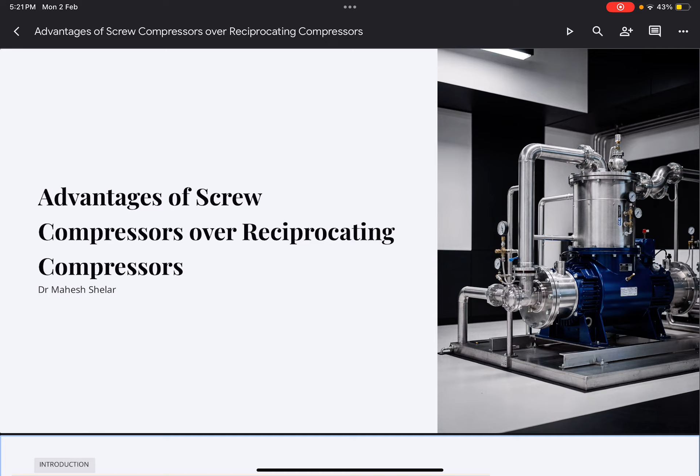Friends, we would be discussing screw compressors with reference to reciprocating compressors, wherein we would emphasize the advantages of the screw compressors over the reciprocating compressors. So, this is the agenda of discussion.

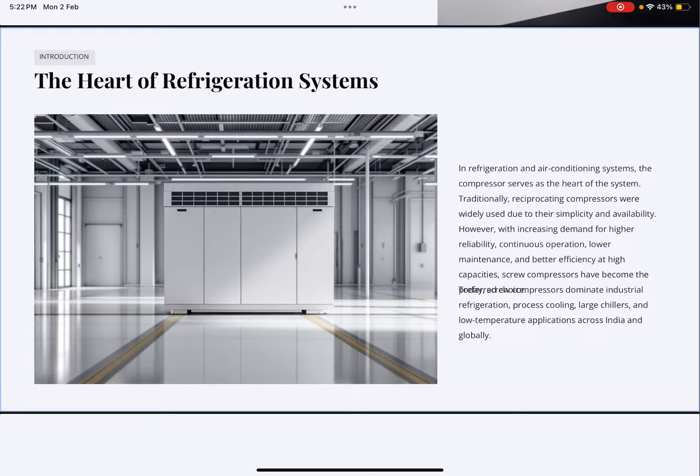We all agree that compressors are vital for refrigeration systems and they perform an important function of maintaining the pressure difference between the condenser and evaporator. Traditionally, reciprocating compressors are widely used. They continue to be used, and the reason being that they are simple, they are readily available. However, of late, in some applications, reciprocating compressors are replaced by the screw compressors, and they are considered to be more reliable and efficient than the reciprocating ones.

To differentiate between the two technologies, we need to understand that both the reciprocating compressor as well as the screw compressors happen to be positive displacement machines. It means the pressure rise is obtained because of the reduction in the volume. Construction wise, they are different. One is reciprocating, other is rotary. Reciprocating compressors have a piston cylinder arrangement, whereas the screw compressors have two intermeshing rotors.

Reciprocating compressors have the suction valve and the discharge valve, whereas the screw compressors do not have a suction or discharge valve. Reciprocating compressors deliver during the delivery stroke when the discharge valve is open, so the refrigerant flow is intermittent. In the screw compressors, on the other hand, one gets a continuous compression process.

An important difference is the presence of more moving parts and higher wear in case of reciprocating compressors, and by virtue of very few moving parts in the screw compressors, the maintenance is less and the wear and tear is lower.

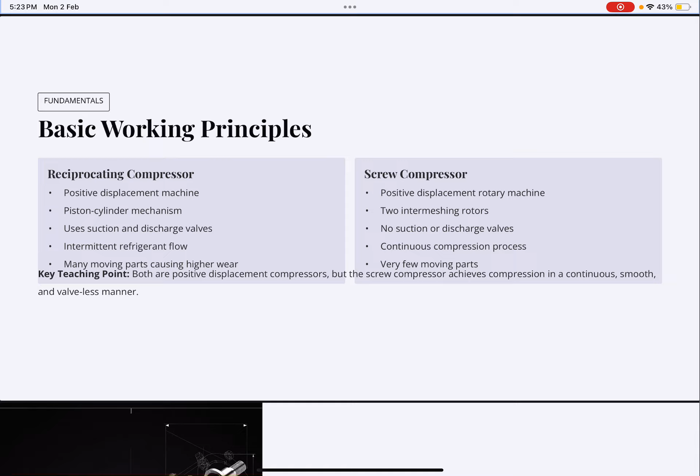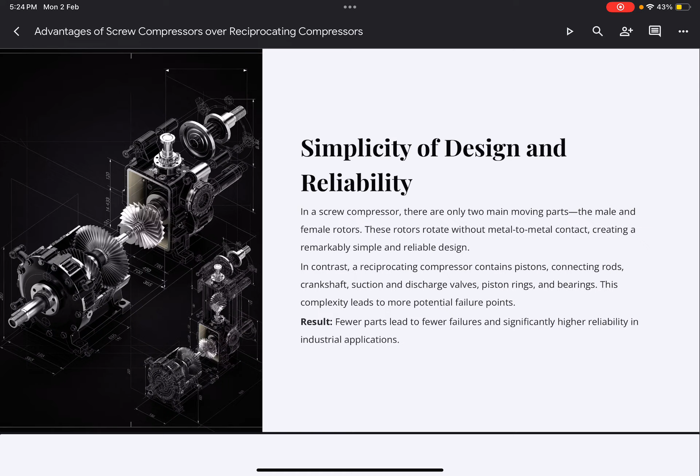Because of such a simple design, screw compressors basically have only two moving parts, as against the reciprocating compressors which have pistons, connecting rods, crankshafts, suction and discharge valves, piston rings and bearings. One can surely say that screw compressors are simple in design and more reliable. So the high reliability is because of fewer parts. Fewer parts, so fewer failures.

The lubrication system in case of screw compressors is what is known as the fully oil flooded lubrication system. What does that mean and what role does it play? It means that the compressor remains completely flooded with oil, and this oil performs three critical functions. One obviously is lubrication, the other two are cooling and sealing.

Because the lubricant itself performs the role of cooling, we need not go for an additional cooling technique for the compressor body, and because of that overheating is prevented. And because the entire compressor is well lubricated and completely flooded, that design gives a higher service life for the bearings as well as the rotors, and hence the maintenance requirements are dramatically reduced in comparison with reciprocating compressors. So that is the lubrication advantage for the screw compressors.

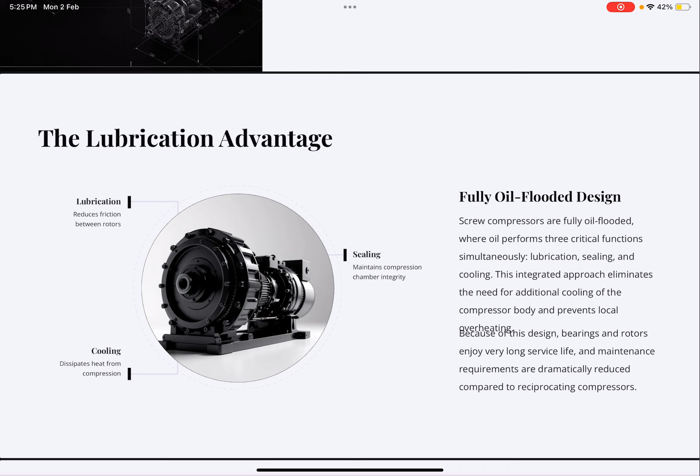Another important advantage is temperature control because of the flooded type of lubrication system. The oil absorbs the heat, as a result of which the discharge temperature is lower than that obtained with reciprocating compressors. With lower discharge temperatures, the compressors are well within the safe operational limits. A lower discharge temperature means lower thermal stress, no oil degradation, overall improvement in compressor life, and better performance.

To quantify the advantage, let us look at the numbers. Screw compressors reportedly operate for 40,000 to 60,000 hours without any major overhaul. Screw compressors report zero valve failures because there are no valves to fail. And because there are no piston rings, there is zero piston ring wear. So this is the advantage over reciprocating compressors: absence of valves, so no valve failure; absence of piston rings, so no piston ring wear; and longer operating hours without major overhaul.

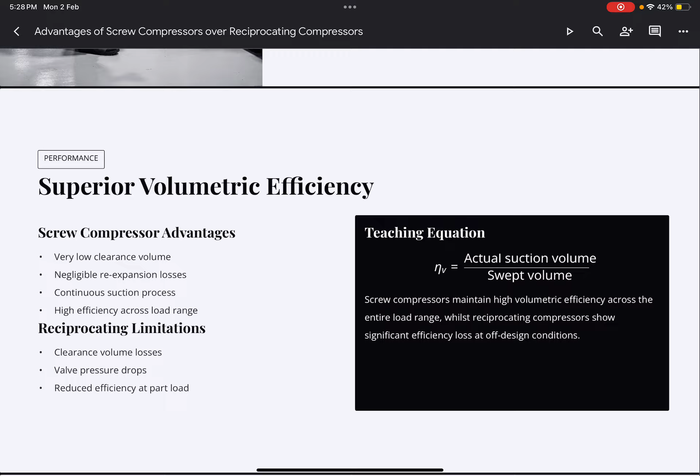The other advantage is that there is no clearance volume. We have studied that reciprocating compressors have a lower volumetric efficiency because of the clearance space which has to be kept in the arrangement, and one cannot avoid it because of the valves present in reciprocating compressors. So screw compressors get the advantage of superior volumetric efficiency because of the negligible clearance volume.

Because of the absence of clearance volume, there is no question of re-expansion. As we discussed for the volumetric efficiency of reciprocating compressors, it is not 100% because of the re-expansion of the charge trapped in the clearance volume. So reciprocating compressors have a limitation of clearance volume losses, valve pressure drops and reduced efficiency, whereas the screw compressor has a superior volumetric efficiency across the load range.

Another important advantage of the screw compressor is in capacity control. In screw compressors there is an internal slide valve mechanism used for the capacity control. So depending upon what capacity the system has to operate at, the slide valve mechanism adjusts itself accordingly. This way one can achieve a variation in capacity from 100% to 10% using the slide valve capacity control.

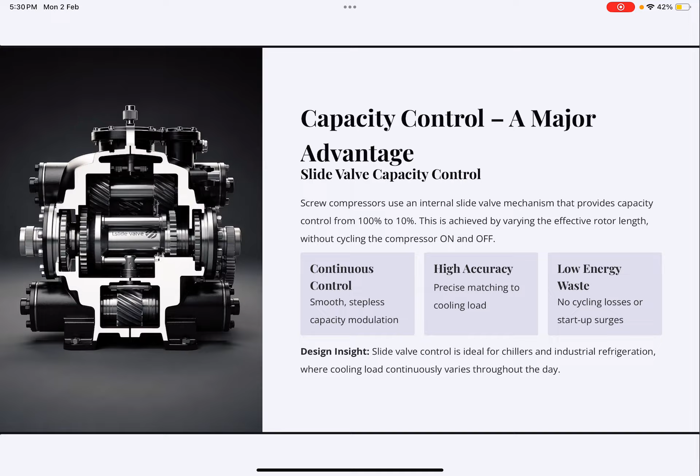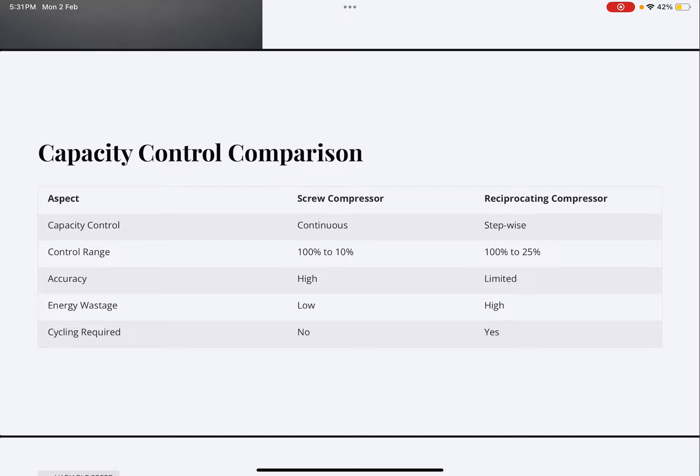The slide valve control is especially ideal for chillers and industrial refrigeration, where the cooling load varies continuously throughout the day. So the main advantage of the screw compressor is in capacity control, as you see in this table, and the efficiency advantage is also substantial.

Another important integration possible for the screw compressor is with the variable speed drive. Screw compressors can operate efficiently at variable speeds because the lubrication system is independent of the rotational speed. Electronic controls allow smooth speed variation. In reciprocating compressors, on the other hand, if you change the speed, the lubrication quality gets affected, and there are also mechanical limitations which restrict the speed range.

So with the new technology called VFD, variable frequency drive technology, screw compressors are ideal. They are more compatible with VFD-based technology, and that technology is now becoming common, in fact mandatory, across India.

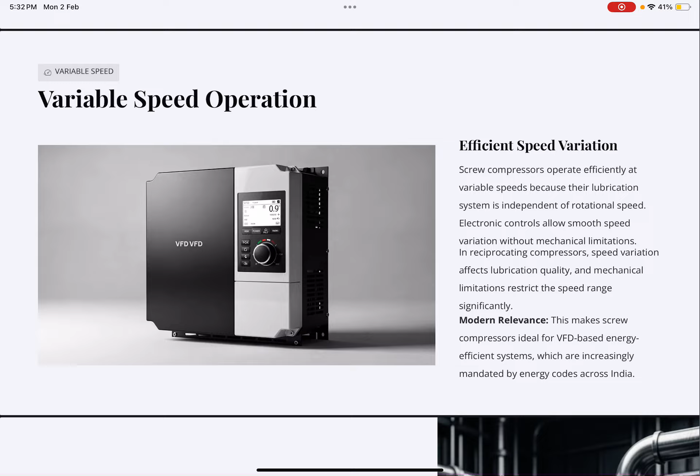The third important advantage of screw compressors is the ability to handle liquid refrigerant. In reciprocating compressors, even a small liquid slug can lead to valve damage or break the connecting rods, which might lead to complete compressor failure. Screw compressors, on the other hand, can safely handle liquid because of the flooded compressor design, which absorbs the shocks, and because there are no valves, there is no question of valve breakup.

In cold storages or during defrost cycles, liquid flood back is common, that is, liquid might enter the compressors. Under such conditions, screw compressors are advisable because they will survive liquid flood back, whereas reciprocating compressors often fail.

The advantages of oil management in screw compressors are given on this slide. One advantage is that the oil operates at a higher discharge pressure, which eliminates the foaming risk otherwise present in reciprocating compressors. Second, there is no oil migration problem during the startup cycle; the oil will not migrate to the crankcase as in the reciprocating compressor.

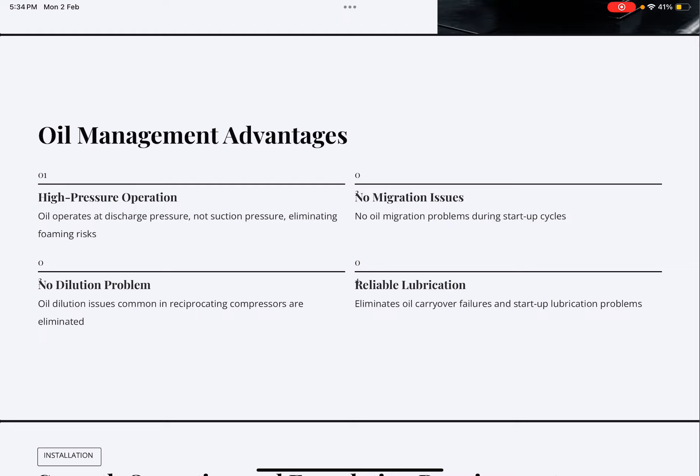So the advantage of screw compressors is pure rotary motion with no unbalanced inertia forces, so the vibration levels are quite low. Even a lighter foundation is sufficient for these compressors, and that leads to lower installation cost.

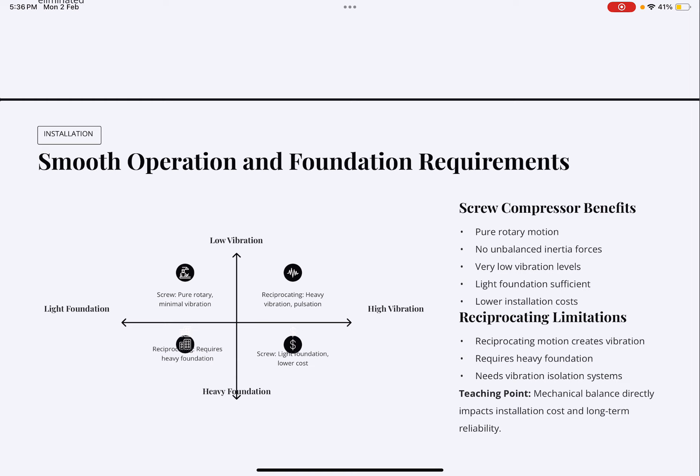On the other hand, because reciprocating compressors experience vibrations, we need heavier foundations and vibration isolation systems. So in installation also, reciprocating compressors have a disadvantage compared to screw compressors. Screw compressors require a lighter foundation, have lower installation cost, and less vibration.

Maintenance and skill requirements are also an advantage for screw compressors, because the components are interchangeable, they can be easily replaced, the overall procedures are straightforward, and less skill is demanded. This is compared with reciprocating compressors, which require skilled technicians, precision assembly, and frequent inspections, which increases the operational cost.

So all in all, screw compressors are found to be extremely reliable and cost efficient compared to reciprocating compressors, and hence are widely used in industrial applications.